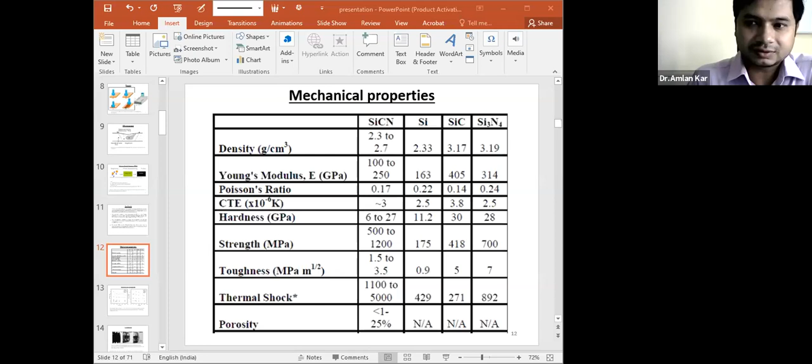Thank you sir, just let me check whether my presentation is visible. You may please. Okay sir, we will wait for like 9:30, it's the scheduled time. We'll wait for a few minutes. Meanwhile you can just keep your cover page up, sir. Okay, now I'm just checking whether it is visible or not. Yeah, it's visible sir, okay.

So are you, oh sorry. Yeah it's visible sir, good. Now you can see? No, yeah sir. Yes sir, okay.

So we'll wait for a few more minutes sir, let the participants join. Yeah, no problem. 9:30 is the scheduled time, right sir? I'll let you know at what time we would start, maybe hardly 5 minutes, it will take 5 to 10 minutes sir. Okay no problem, how are you doing sir?

Now everything is standstill, there is no movement. Yeah, same thing here also. But people thought of starting this education institution with students and all, but there were some problems occurred in different states.

We had a plan of inviting students on campus. It wasn't successful because at the beginning students showed willingness, but later they said one of my friends would come, then I would join, but no one came. Still we took measures and made respective arrangements for students' arrival on campus, but it didn't succeed. So they are sticking with the decision that they would attend most probably after this December, that's what they were telling.

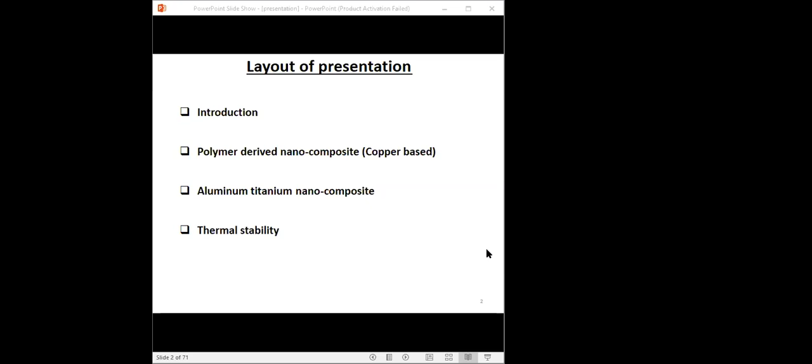Let me give you brief details about Professor Amlan. Professor Amlan completed his PhD in mechanical engineering from Indian Institute of Science, Bangalore, in 2017. His PhD work was on micromechanisms associated with friction stir welding of aluminum with titanium. Dr. Amlan completed his MTech in 2011 in metal forming, metallurgical and materials engineering from Indian Institute of Technology, Madras. His thesis title was Lateral Bulging Measurement and Compensation of Laser Cut Press Brake Bend Aluminum, Mild Steel, and Stainless Steel Sheet Materials.

He completed his BTech in 2009 from the Department of Mechanical Engineering, Jalpaiguri Government Engineering College. His BTech thesis was titled Efficiency Determination of Industrial FBC Boiler and Overall Study of Steam Power Plant, in 2008. If I speak about the research experience and various activities Professor Amlan is dealing with, there are many more to mention.

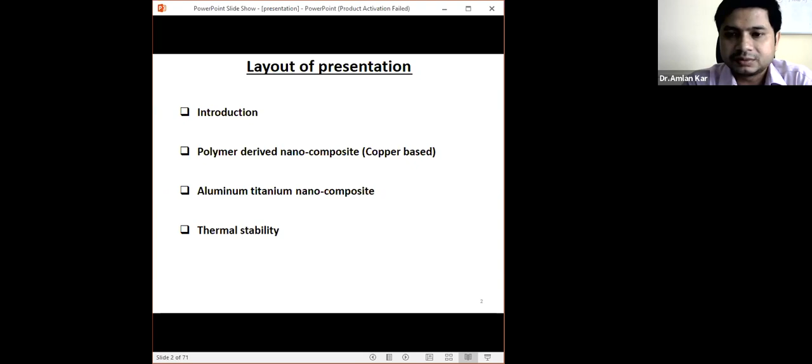So the layout of my presentation is: I will start with an introduction about nanocomposites, and then we'll discuss some case studies. The first one is the polymer derived nano-composite, which is a copper-based nano-composite. The second is the aluminum-titanium nanocomposite, developed from welding of aluminum and titanium, where in the weld nugget the composite is developed locally. We'll study the different influences of it, and finally study the thermal stability of this composite.

As far as introduction is concerned, we see nanocomposites in different parts of the world and in day-to-day life, but we don't realize it all the time. A nanocomposite is a multi-phase solid material where one of the phases has 1, 2, or 3 dimensions of less than 100 nanometers, or a substructure having nanoscale repeat distance between the different phases that make up the material. Basically, a nanocomposite is a composite where one of the constituents is in nanoscale, meaning generally less than 100 nanometers.

In different systems, we have seen nanocomposites in our day-to-day life. Nanocomposites are found in nature as well, for example in the structure of abalone shells, and also in our bones.

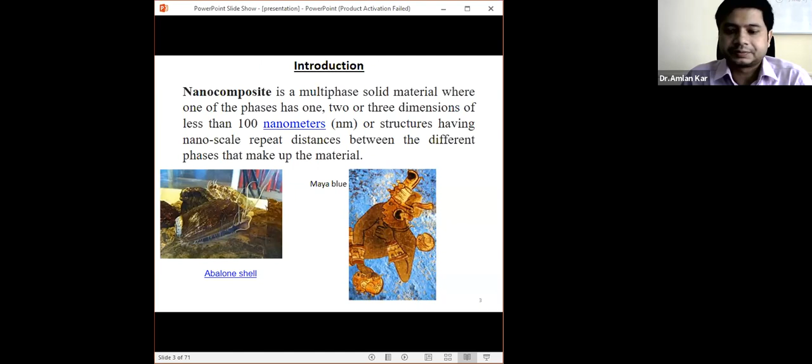So what are the important properties? In mechanical terms, nanocomposites differ from conventional composite materials due to the exceptionally high aspect ratio we obtain. Aspect ratio means surface to volume ratio. The reinforcing material can be made up of particles, sheets, fibers, polymers, and different kinds of materials.

Different kinds of material have been mixed together to form a nanocomposite. In this nanocomposite, the main important factor is the interface between the matrix and the reinforcing particles, or whatever phases are used for reinforcement.

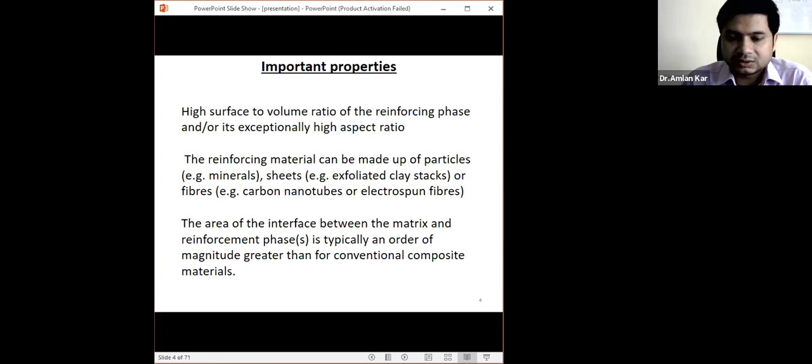This interface is very important, because during tensile testing, the interface is subjected to a higher amount of residual stress. To overcome or sustain this residual stress, the interface properties should be very high compared to the matrix material. Otherwise, interface fracture may take place.

There are different types of composites we have seen, but basically the objective is to improve the strength of the material. So the matrix can be reinforced with a second phase material to obtain the composite. We have also discussed that the second phase in a composite is generally in the nanoscale range in case of nanocomposites.

There are different types of nanocomposites that have been worked on: ceramic matrix composite, metal matrix composite, polymer matrix composite, magnetic nanocomposite, and heat resistant nanocomposite. These are a few, but the first three - ceramic matrix composite, metal matrix composite, and polymer matrix composite - are the three matrix composites which have been extensively used or worked on.

For example, metal matrix composite. Metal has been used as a structural component in metal matrix composite for several reasons, because of high modulus of elasticity, dimensional stability, high specific strength, formability, and machinability.

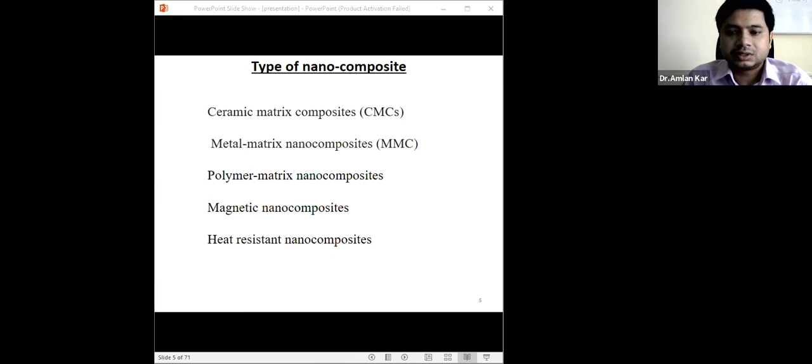There are different manufacturing or synthesis methods to obtain a metal matrix composite. There is the molten state method and the solid state method. The molten state methods are casting, liquid infiltration, spray deposition, and in situ processing. Spray deposition means you melt the metal, then the particulates as well as the molten metal are sprayed onto a substrate to get a composite material. It is a deposition method.

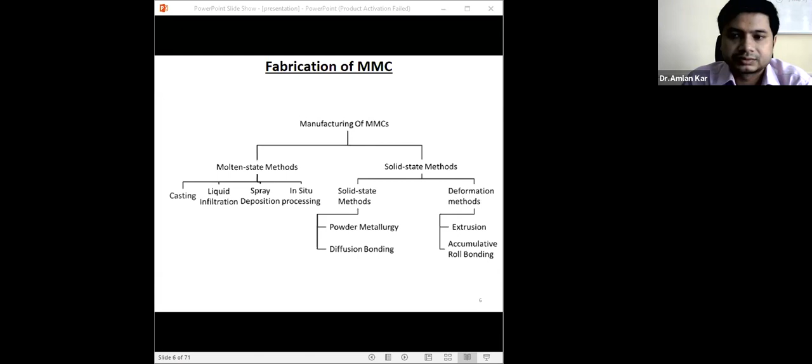Similarly, there are different solid state methods available, like powder metallurgy and diffusion bonding. These are two solid state process methods, and deformation methods are also used, like extrusion and accumulative roll bonding. A combination of both gives you friction stir welding or friction stir processing method. These are the different methods through which you can get a metal matrix composite.

First, we are discussing the polymer-derived nano-composite of the copper based matrix. We have also worked on aluminum with the same methodology. So what is the method? This is the friction stir welding method, a solid state welding method through which the nano-composite has been fabricated.

What are the different steps, and why is the friction stir welding method very useful? Solid state methods have gained a lot of interest recently because issues related to melting of the material and solidification, like solidification defects or porosity, can be substantially reduced using the solid state method. One popular solid state method is powder metallurgy. The powder of both the matrix and the reinforcement are mixed together and compacted, followed by sintering at high temperature. In this process, porosity in the matrix is the common issue and the main problem.

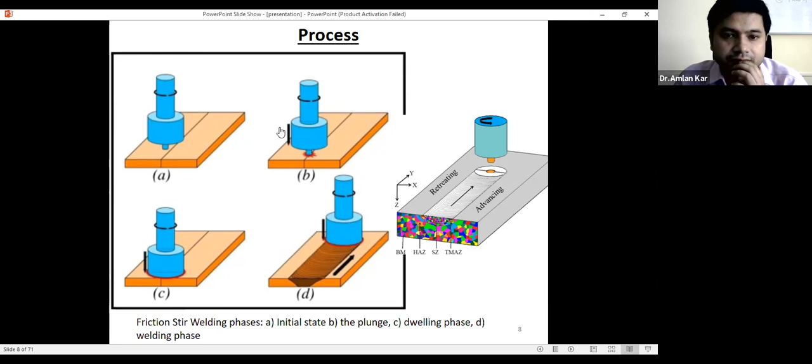So if I show you one of the processes, then you can understand. I think you cannot see. Okay sorry, let me show you the process. Video is not coming. One minute. I think there is some issue, that's why the PPT is not able to show.

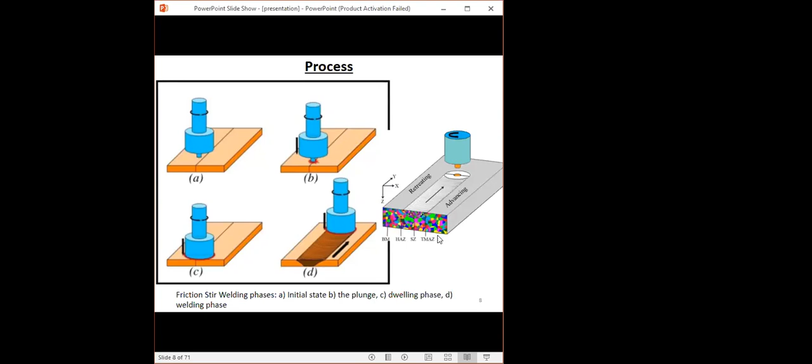So basically this is the process, and after processing you can see different kinds of phases being formed, and there is grain refinement because of high deformation energy being applied, high strain and strain rate deformation. Because of that, in the matrix material you are getting the reinforcement particle as well as grain refinement.

So if a material is subjected to grain refinement, then due to the Hall-Petch equation, which defines that if the grain size of the material decreases, there is an improvement in mechanical strength. So since in the nugget or the processing zone the microstructure is very, very fine, you can expect a better mechanical property.

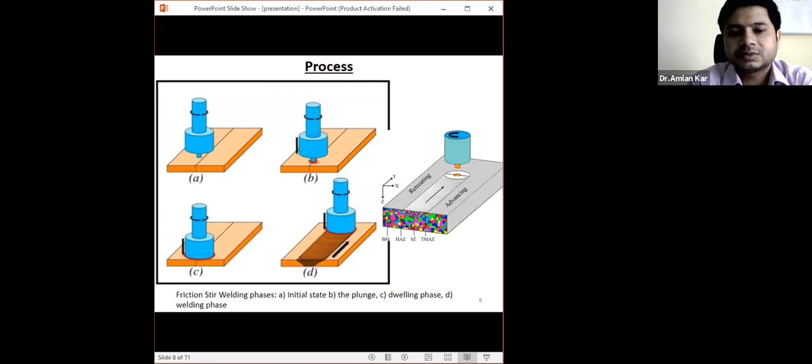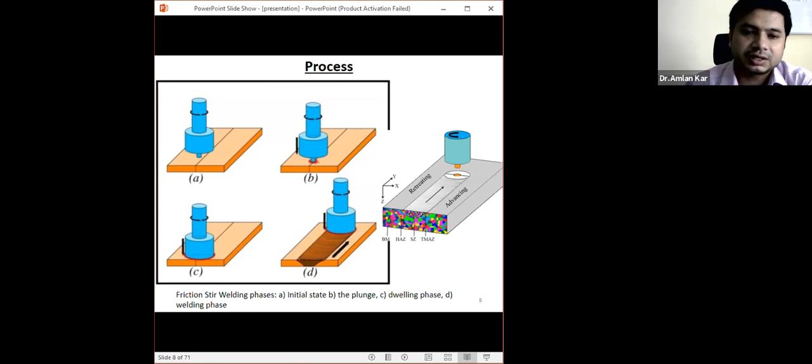As well as you are adding some reinforcing particles like ceramic particles or metal particles. Because of these particles also there is an improvement in mechanical property, which we can see by conventional methods also, like powder metallurgy. So if you add some particles homogeneously, there is an improvement in mechanical property. So there is a two-way advantage you are getting in this particular case, and ultimately you are getting the composite property in the nugget zone.

If you consider this welding, the center of the zone is subjected to some sort of welding. So this is a particularly useful method for repairing work, and also if you want to improve the mechanical property of certain locations of your component, then this is a very ideal method to improve the property of particular locations.

Because if you go to some other welding means, or during repairing work, then due to the heat affected zone and the melting of the material, associated defects arise, like solidification defects, porosity, residual stress. All these sorts of problems come into picture. But since the temperature evolution in this particular case is much lower than the melting point of the material, the problem due to solidification does not come into picture.

And since the temperature is very low, you can overcome the residual stress substantially. So therefore, this is the process where you can develop a local composite in a particular location where you need improvement in mechanical property.

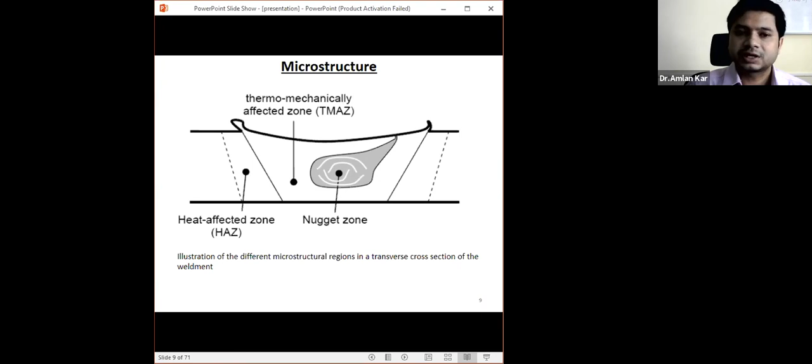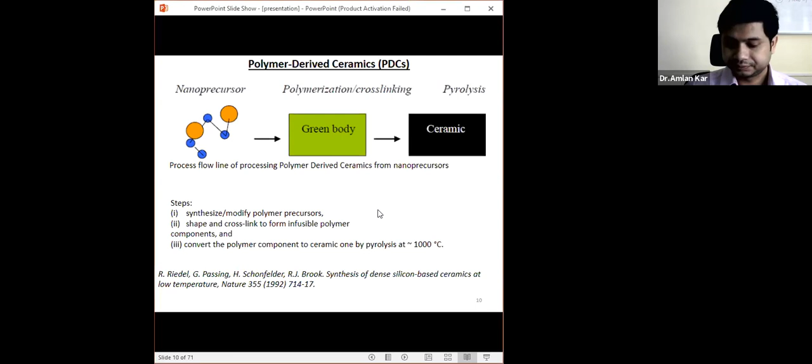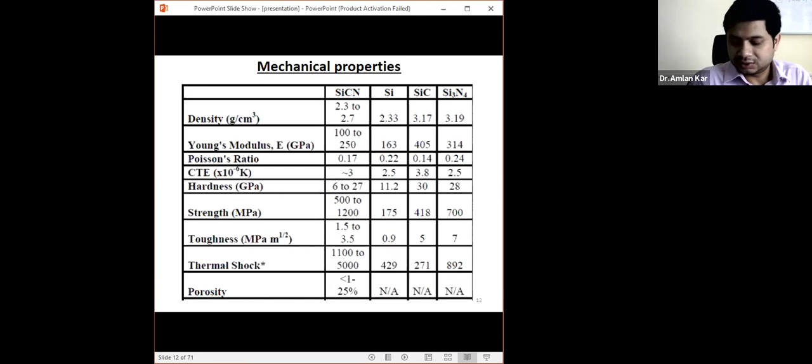These are the factors considered during fabrication of the composite. Mechanical properties like hardness and modulus of elasticity are much comparable to the other particles. The modulus of elasticity is very low compared to other ceramic particles, but slightly higher compared to silicon particles, so depending on the property, you get a different kind of composite material.

In the present case we are looking at Si3N4, SiCN. The major challenge is that because of the higher hardness of these ceramic particles, as I discussed, the hardness is very high, measured in gigapascals.

Since the hardness is very high, the material is subjected to wear on the surface of the tool. Our tool is rotating continuously, so when the tool material comes in contact with the ceramic particles, the ceramic particle creates a crater on the surface, and therefore the tool surface is subjected to wear and tear.

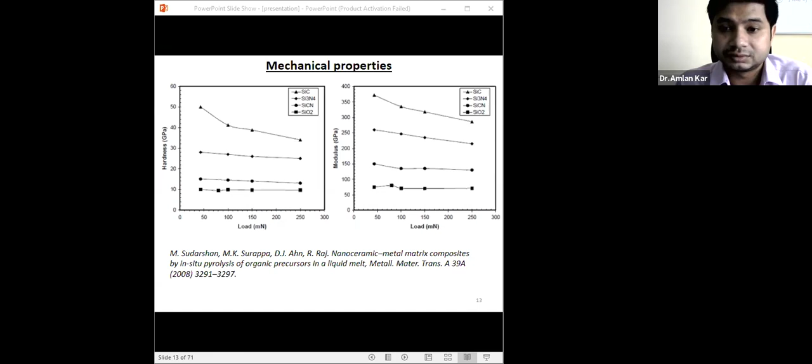This is the main challenge in case of ceramic matrix composites. So if you directly incorporate the ceramic particle in the matrix and then do the processing, it is very difficult to obtain a homogeneous property from the beginning to the end of the process, because depending on the length of the process, the features of the tool change.

Because of the change in the tool features, there is a change in the mixing of the particles in the matrix, and therefore there is a possibility of having a difference in the physical property of the material. So the objective is how you can overcome this problem.

This problem can be overcome as we can see in this process. Here the polymer particle we are getting is directly incorporated into the matrix material. You can see this is the matrix material, copper, and the polymer. You are cutting a groove, and the polymer particle is filled into the groove.

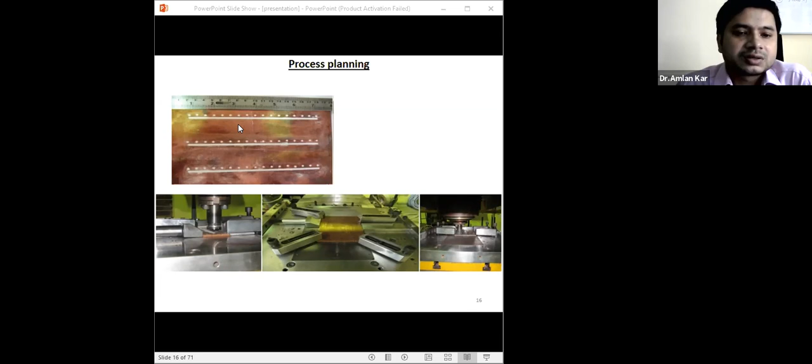Since it is a nano-grain size of the polymer particle, when subjected to pyrolysis, that nano-sized polymer is converted to nano-sized ceramic particles. Then when you process it, there is no possibility of wear of the tool, and hence we get a complete nano-composite.

After pyrolysis, the sample is processed again using the same process parameters to redistribute the ceramic powder and remove porosity if present. Generally porosity is available in the particle because when it is subjected to pyrolysis, whatever gas evolves from the polymer creates or develops porosity inside the matrix. To overcome this porosity effect, a third pass or additional friction stir processing has been conducted to eliminate the porosity.

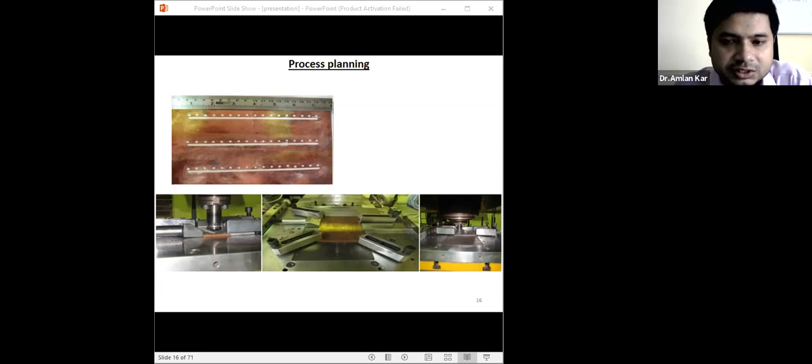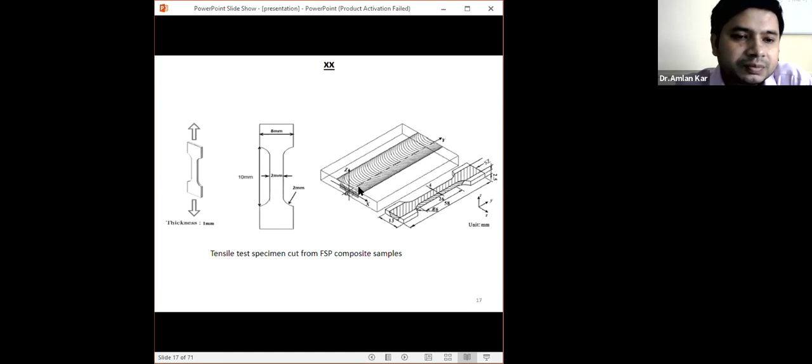This is the sample dimension. You can see from the interface, from the center we have taken the sample. This dimension is specifically chosen to measure the mechanical property of the center portions. This is the composite being developed by my colleague, and you can see this is the center portion, from where you can take out the sample and get the microstructure.

After the deformation, you can see there is a substantial amount of grain refinement. But if you add additional friction stir processing passes, there is an increase in the grain size due to the higher heat input. So it is important to have process optimization.

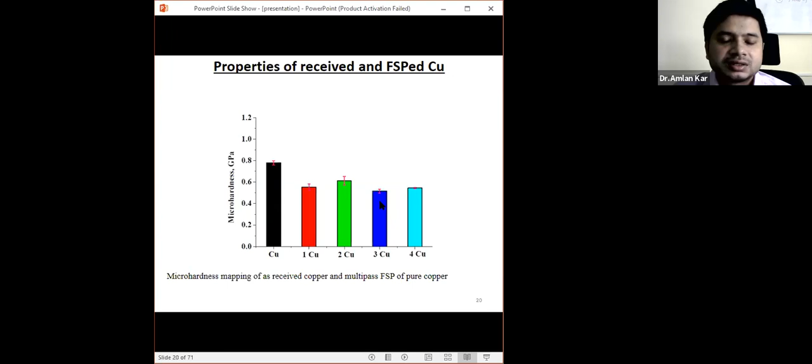You can see the microhardness. Since after the fourth pass there is an increase in the grain size, you can see there is a reduction in the microhardness.

If you see the number of particles after the first pass, intermediate pass, and the fourth pass, you can see that after the fourth pass there is an increase in the number of very fine particles. This is because of continuous fragmentation of the polymer particle, which has low fracture toughness as I discussed. Because of the low fracture toughness, it gets fragmented, and because of the fragmentation, the coarse particle that was there is subjected to becoming nano-sized. This nano-sized polymer particle is consolidated and distributed in the metal matrix.

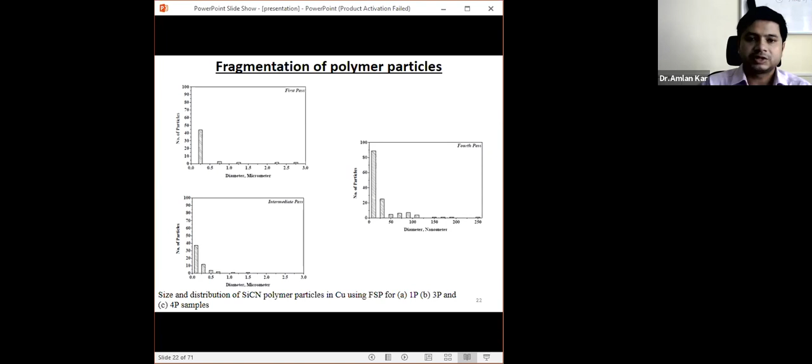You can see that when this polymer particle is there, there is an improvement in the microhardness a little bit, not substantially.

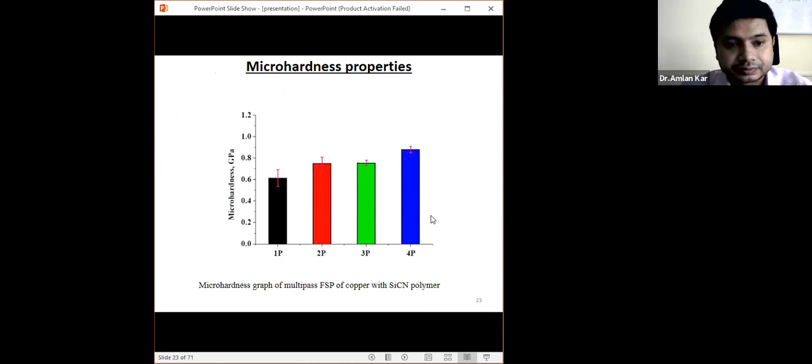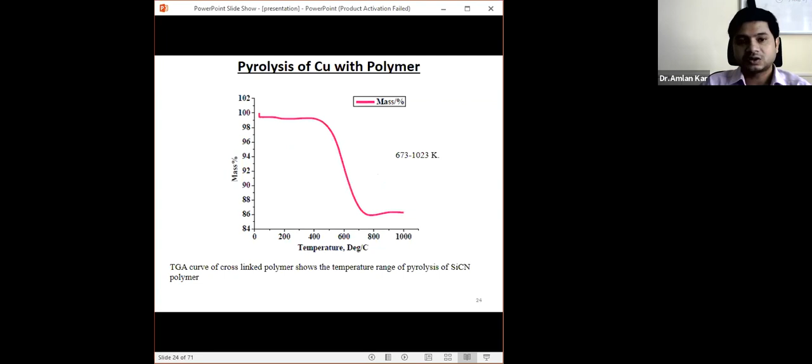To understand the pyrolysis temperature, our colleague has done some TGA analysis. From there we understood that the pyrolysis temperature, or the degradation, starts at 673 Kelvin and ends around 1023 Kelvin. Within this temperature range there is degradation, meaning this is the temperature at which there is mass loss of the composite, and this mass loss is due to pyrolysis of the composite material or pyrolysis of the polymer material. We have also calculated the temperature of the process, and we have seen the temperature is around 923 Kelvin, which is within the range of pyrolysis temperature.

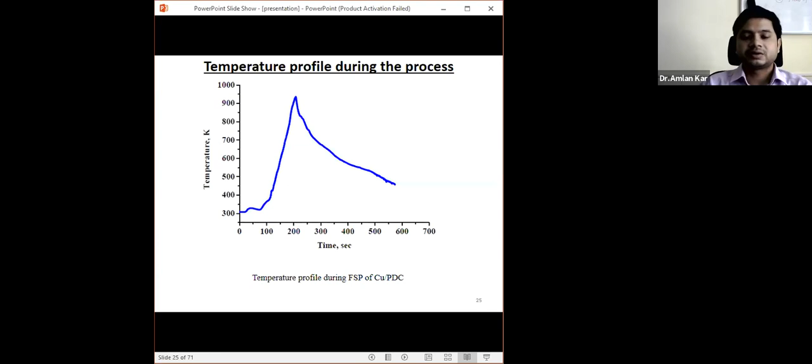So we can understand that during the process itself, some of the particles might be converted to ceramic, and these particles are nothing but very nano grain size particles developed during the process. Why only the nano grain size particles are subjected to pyrolysis so easily? That is because the nano grain size particles have a higher aspect ratio, so the activity range is also substantially improved because of the higher activation of these nano grain size particles. This is subjected to pyrolysis very easily, the activation energy for pyrolysis is substantially reduced, and therefore it undergoes pyrolysis and converts to ceramic very easily.

And we have seen from the phase analysis that there is a formation of different sort of compounds - SiCN, because SiCN has also been seen, and Cu-SiCN also been obtained. So you can see different pores formed in the intermediate stage, and we can see also the pores formed inside the particle as well.

And during the deformation process, since the friction stir processing is a high strain deformation process, whatever crack been developed inside the particle is actually propagated further. And because of the propagation of the crack, this individual layer is subjected to fragmentation. Because of the fragmentation, you can see smaller grain size, smaller particles are also found in the composite material.

So basically, because of this fine distribution of the particle and because of the pores, this cracking of the particle takes place during the deformation, and therefore we obtain a fine particle distribution in the final composite matrix.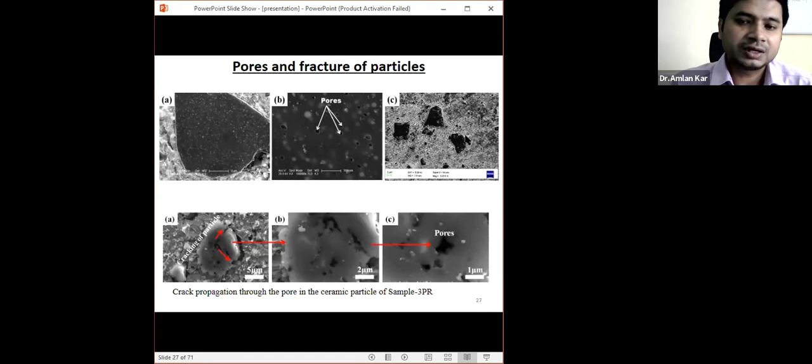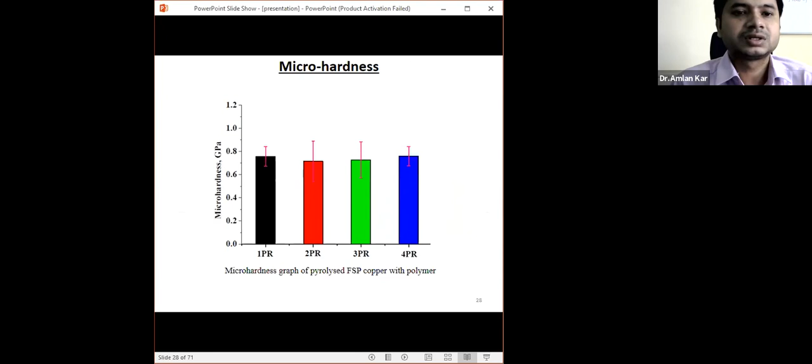And after the pyrolysis, you can see there is no change in the hardness. Why is there no change in hardness? Because of the availability of a high fraction of pores in the composite. During the indentation, it does not resist the indentation load because of the pores available in the composite, and therefore there is no increase in the hardness.

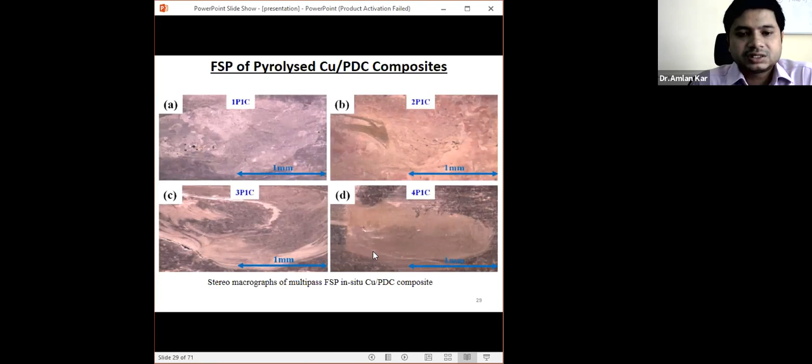And this is the microstructure. Macrostructure, you can see - after the first pass, this is inhomogeneously distributed, but after the fourth pass, you can see their distribution is more or less homogeneous.

And you can see also there is a distribution - this is the first pass and this is the final pass. In the final pass, you can see the reinforcing particle is substantially reduced, and the size is very, very small. The distribution is the Gaussian sort of distribution, you can see.

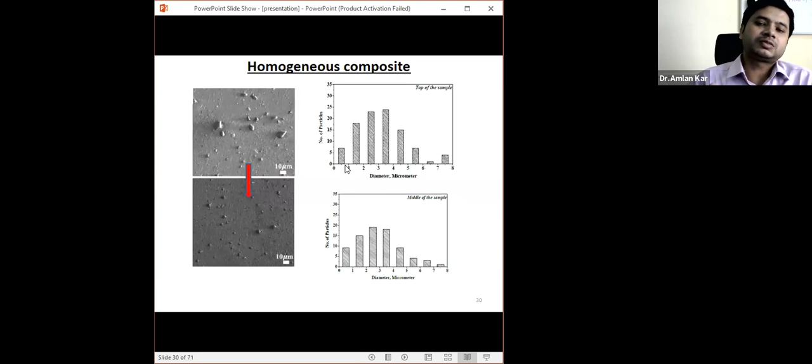And this sort of distribution is very useful in metal matrix composite, because it gives the useful property or balanced property in the metal matrix composite. And this Gaussian sort of distribution you can find in the top of the sample, middle of the sample, and the bottom of the sample. Because of the homogeneous distribution, we get homogeneous property from the top to the bottom of the composite.

And this is the microstructure. You can see this is the EBSD image. From there, you can easily find out the microstructure ranges from something about 0.1 micron to 10 micron - even the microstructure of the matrix material I'm talking about, it is very, very fine. The average grain size is around 1 or 1.2 microns.

So the microstructure of the base material initially we had taken was how much? It was approximately 74 microns. But after the process, the microstructure of the matrix material itself is very, very fine. So according to Hall-Petch relation, we can expect a better mechanical property if we don't consider the reinforcing influence. Depending on the reinforcing particle, the property could have been improved further.

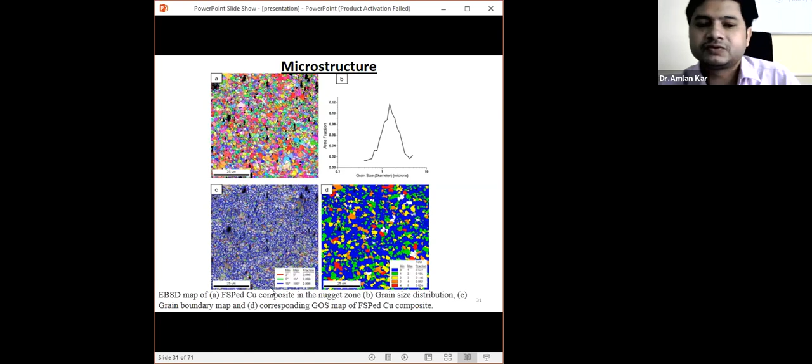And this is, you can see there is a different type of grain boundary you can see. Here the different grain boundaries you can see. There are three kinds of grain boundary that can be visible: subgrain boundary, low angle grain boundary, and high angle grain boundary. So depending on the color, you can find out what kind of grain boundary has been developed during the process. From there, you can easily find out that 80% of the grains are surrounded by high angle grain boundary, which is represented with the help of blue color here.

So since the material is surrounded by high angle grain boundary, that means it is a recrystallized microstructure. And from the GOS map on the right side, you can see it represents how much dislocation has accumulated inside the grain. From there you can see the range is 0.0 to 2, the minimum is 0 and the maximum is 2. The color representing blue and green actually represents the recrystallized grain. So you can see that almost 80% of grains in the matrix material are recrystallized. So since the matrix material is completely recrystallized, we can expect better ductility.

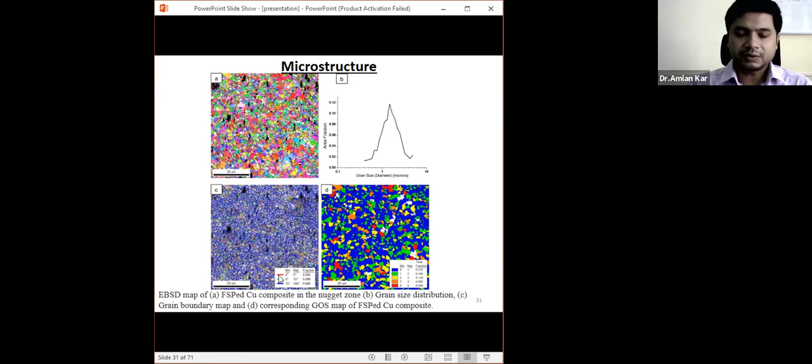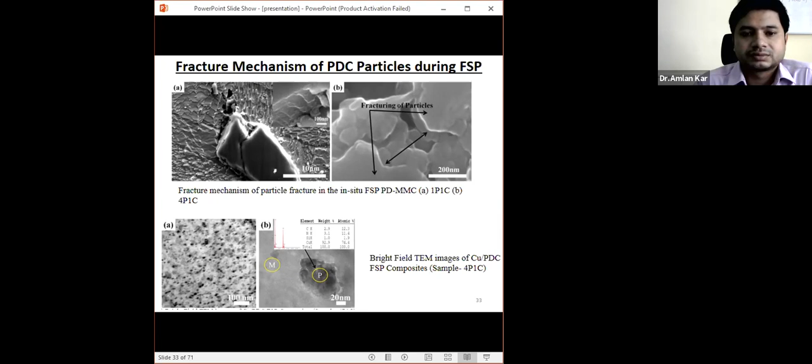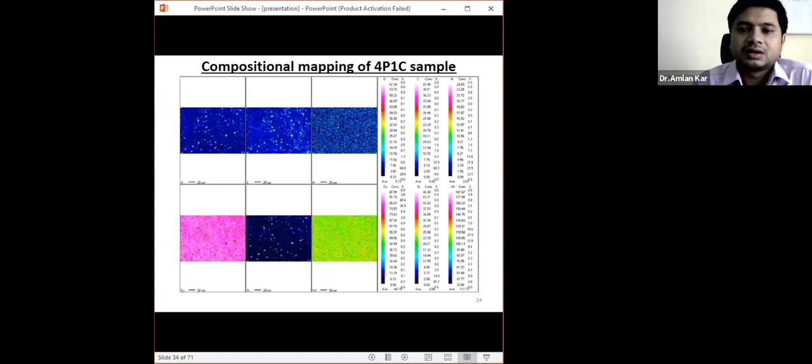Which is SiCN, can be clearly visible. So this is a fabrication of homogeneous metal matrix composites, which has been derived from the polymer particles. And because after the final pass, if you find some pores and so on, you do a second pass or additional pass, then the pores and any defect present at the interface of the copper and the particle, as well as in the matrix or in the particle, get eliminated.

So therefore after the final pass you can get a very good microhardness property of the material, which is close to 2.6 gigapascal. This is very, very high. If you compare with respect to the initial base metal, initial processed copper, it is almost 3 to 4 times increase in the hardness property.

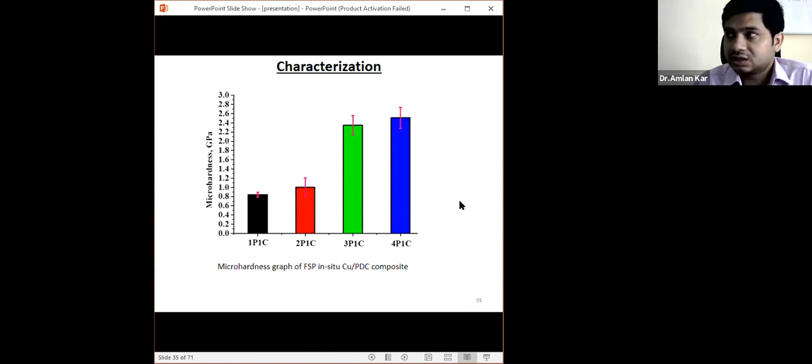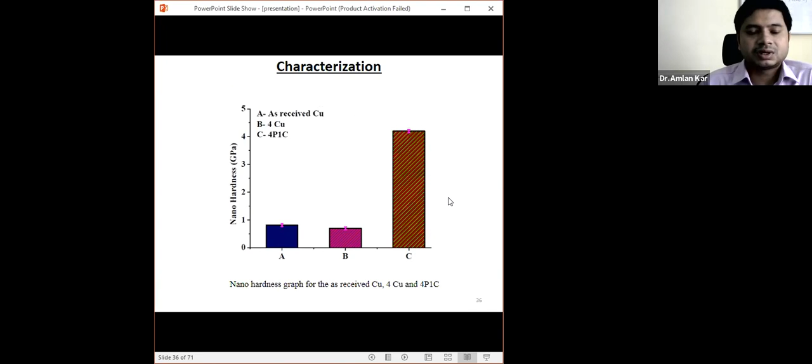So compared to the copper also there is an improvement in the nano hardness property of the particles. What are the reasons for that? Because we are getting the advantage of matrix refinement as well as particle refinement. The particle, which is in the nanometer range, because it is nanometer range, we already discussed the surface to volume ratio is very high.

Or the aspect ratio of these particles is also very high. So therefore we can get activity at the interface level also, and therefore the bond between the particle and the matrix is very strong, and therefore we get very good mechanical properties, like mechanical property in terms of yield strength, elongation, and UTS. Elongation is very high because the matrix material itself is completely recrystallized.

And because of Orowan strengthening as well, where the comparatively bigger size particles or micro range particle size actually restrict the grain boundary mobility or the dislocation mobility. Because of that, there is an increase in generation of dislocations. In addition, the dislocations could not move further or pass through as well. Because of these two factors, there is an increase in the mechanical property in terms of tensile strength and elongation. And since we know that if any material has higher elongation as well as tensile property, the area under the testing diagram will also improve or enhance. So from there we can conclude that the toughness of this composite will be very high.

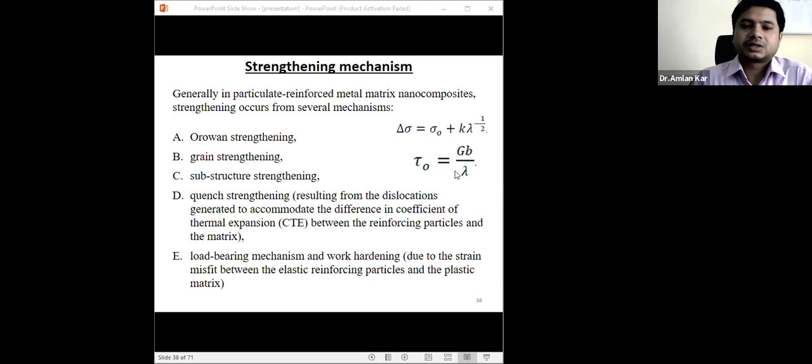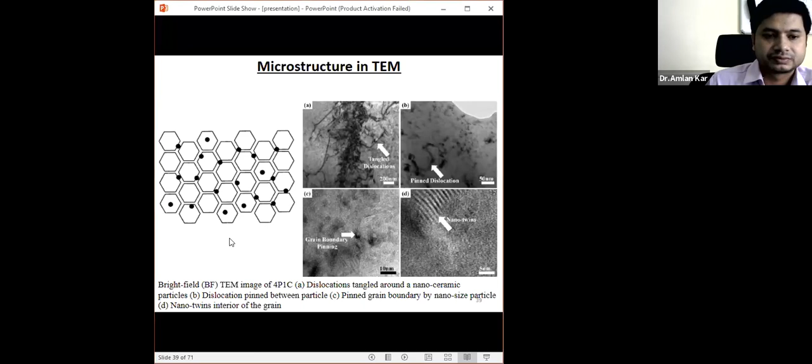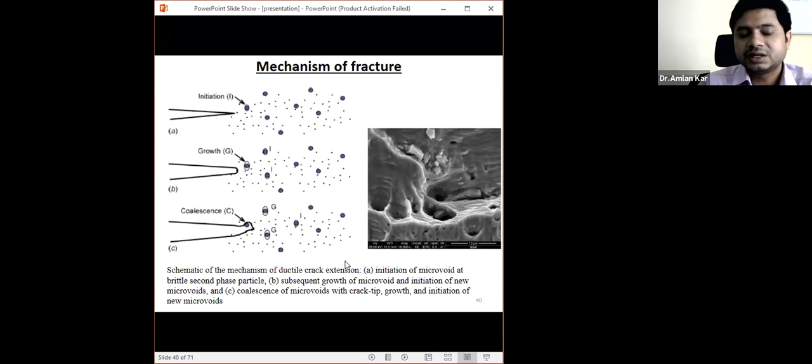So now we are moving to the second part, discussing the fabrication of nano-composite using friction stir welding. This is also local, and it is also the fabrication of thin strips of nano-composite. This is basically the process.

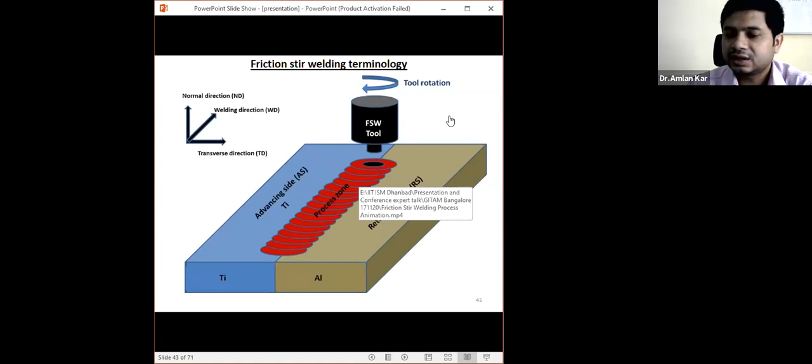When you take two materials like titanium and aluminum, the titanium and aluminum mix together in the process zone, forming a complete composite along the length. This behaves like a composite, and we can understand from there how the behavior takes place.

I have already discussed how the deformation takes place. Around the particles there is a plastic zone and a stirring motion. Because of this stirring motion and the friction between the tool and the matrix material, there is formation of a mechanical mixing zone in the weld nugget or process zone, and we generally observe wear of the tool and shear deformation of the material.

Those are the two phenomena taking place. So to restrict the wear of the tool, we have shifted the tool toward the low melting point material. In this case, we have shifted the tool to the aluminum side so that it has limited interaction with the titanium, and therefore we can prevent the wear of the tool.

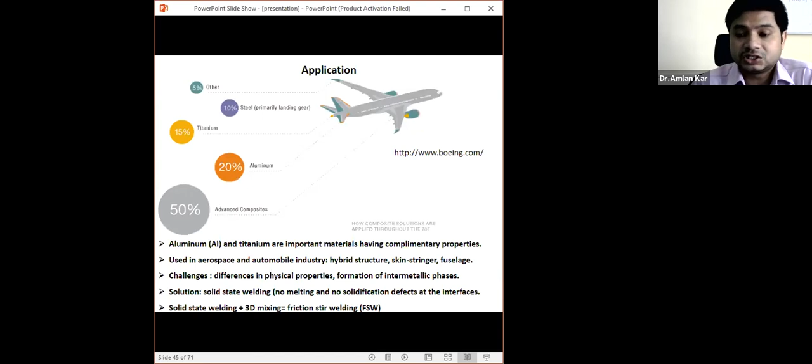These are extensively used in the aerospace industry because of the three-dimensional mixing nature of the matrix and the particles. If you take aluminum and titanium, you understand there is a substantial difference in their mechanical and physical properties, and because of that...

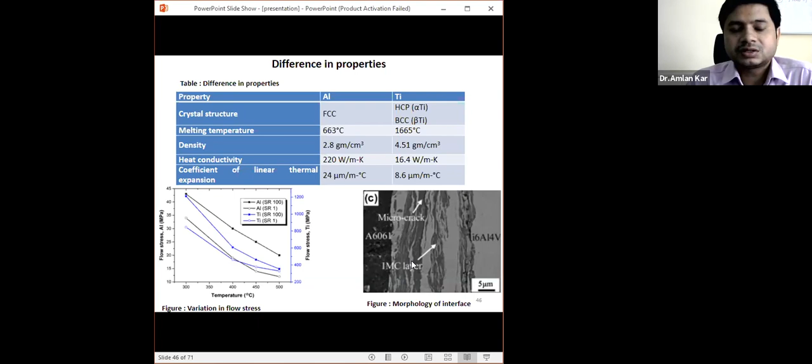Aluminum is recrystallized, but the titanium is subjected to some sort of fragmentation. During the fragmentation, you can see there is development of microcracks and an intermetallic layer at the interface. This is brittle particles which have been fragmented and distributed in the aluminum matrix, and because of that we get a composite property of the weld.

So we have estimated the temperature, which is approximately 410 degrees centigrade. Because of this temperature, we can understand that aluminum behaves like a plastic material, but this temperature is very, very low for titanium. That means this temperature is close to the melting point of aluminum, unlike titanium.

So the aluminum, during deformation, is subjected to hot deformation, but the titanium is subjected to cold deformation because of the difference in physical property. Due to that, the aluminum is generally recrystallized, unlike titanium, which is subjected to fragmentation.

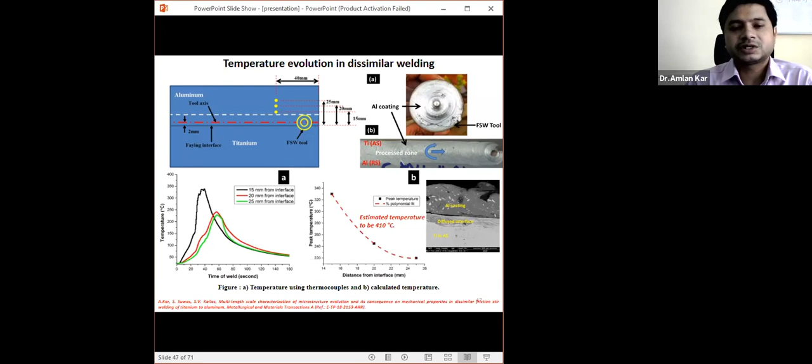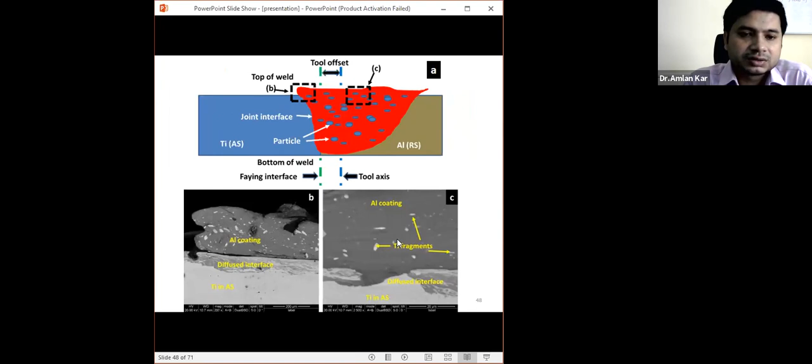So that is the schematic view. You can see that in the nugget zone, there are particles which have been deposited and fragmented, and therefore we get a strip of nano-composite. So you can see the particles, how they are distributed in the nugget zone.

Again, you cannot see, I think. And we have also...

Modeled the process, and we have seen the temperature evolution in this process is close to 410 or 450 degrees centigrade. One of the important factors we have seen is that the temperature below the tool shoulder does not vary much.

So during the process, from one side to the other, from the retreating side to the advancing side, or the advancing side to the retreating side, or in the three-dimensional nature, we can understand that the temperature variation is not substantial in this process. So whatever mechanism is taking place on the top of the weld should also be prevalent at the bottom of the weld as well.

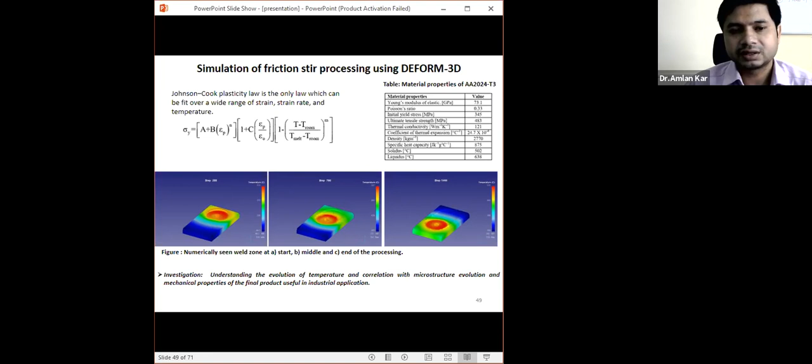We can find out that irrespective of the locations, the morphology or the distribution is similar. And from this distribution, you can see that as the particle size decreases, there is an increase in the number of particles. From there also you can conclude that if the particles are very, very small during the process, we have also obtained nano grain size particles, like 50 nanometer grain size, 50 nanometer particle size particles.

So if you take this trend, we can expect that the nanoparticles developed in this process are very, very fine, and the number of nanoparticles is substantially higher compared to the coarse particles. So as we have discussed, this sort of distribution is very common in different manufacturing processes, and in that sense, for the mechanical property, you can get a combination of mechanical properties.

If you have a micron size particle, a very fine particle, a nano size particle, you get load sharing property, a load sharing mechanism prevails. But if the nano size particle is distributed in a matrix, then you can expect to have higher strengthening, higher ductility because of the Orowan strengthening mechanism.

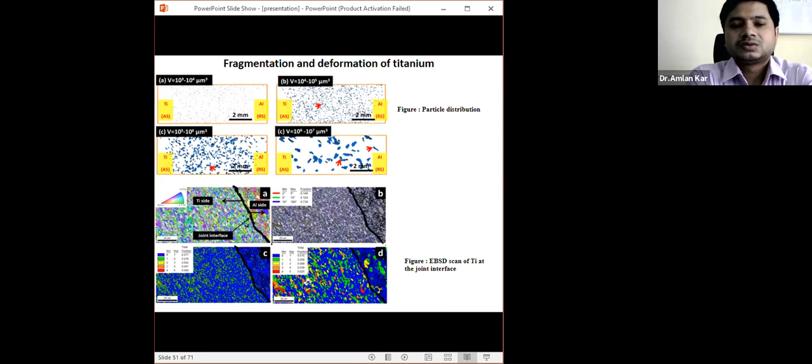We have seen that there is recrystallization, a very unusual phenomenon observed in titanium at 450 degrees centigrade. To understand the phenomenon by which we can predict or engineer the composite, we have understood the continuous evolution of the microstructure of the titanium. From the base material, you can see the microstructure is random, and the grain size is close to 50 microns.

As we come close to the titanium, close to the interface, we can see there is a substantial increase in the twinning. This is one or two twins we have seen in the microstructure, and from the GOS value you can see that most of the grains are completely recrystallized.

And this is the KAM map. The KAM map actually shows whether there is any dislocation activity in a particular location, and the GOS map actually shows the accumulative dislocation inside a grain. So that is the only difference between the GOS and the KAM map.

From here you can understand that the microstructure of the base metal is completely recrystallized, and as the material is subjected to a higher level of strain closer to the interface, twinning develops in titanium. Twinning is the additional mode of deformation in titanium.

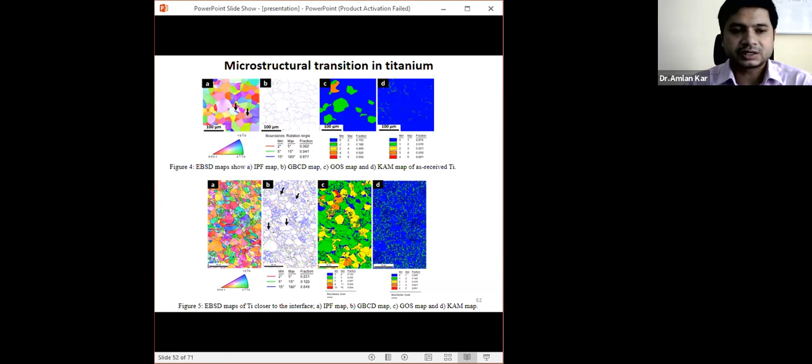At the interface, we can see a completely recrystallized microstructure, and because of that there is fragmentation in the particle. You can see this particle is fragmented from this particle, which is the original particle. From here, the A particles are being fragmented, and subjected to further fragmentation, leading to the formation of very, very fine particles.

So the mechanism we have developed is that adiabatic shear band is the only mechanism through which we can explain this phenomenon, the formation of adiabatic shear band. It is noted that in the adiabatic shear band the temperature is very, very high, close to 400 degrees centigrade, and this temperature evolution takes place only on titanium.

It's not a global temperature, it's a local temperature in the titanium. Because of the evolution of high temperature, it is subjected to recrystallize, called dynamic recrystallization. At the same time, since the adiabatic shear band is an inhomogeneous deformation process, it leads to the development of cracks in the titanium, and while deforming, the propagation of this crack leads to the formation of fine particles, giving us a different kind of particle.

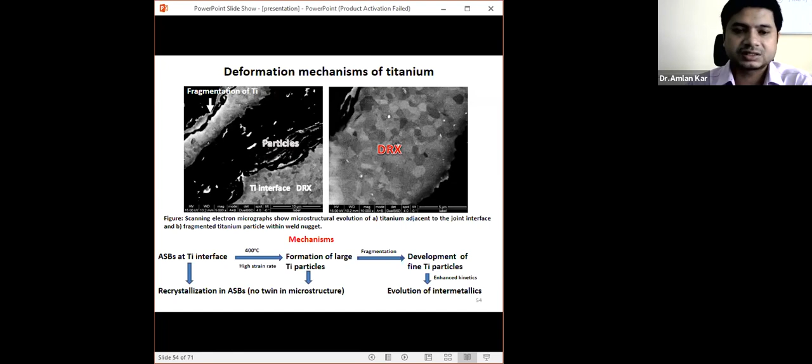So we can see here, this is one of the phenomena. This is the adiabatic shear band, and within the adiabatic shear band we can find very fine recrystallized titanium developed, and this is the recrystallized particle.

From here you can understand that within the particle there is no twin activity being observed, and from there you can understand that this is the adiabatic shear band driven process by which the particles have formed in situ during deformation, leading to the in situ formation of fine titanium particles or fine intermetallic particles in the aluminum matrix.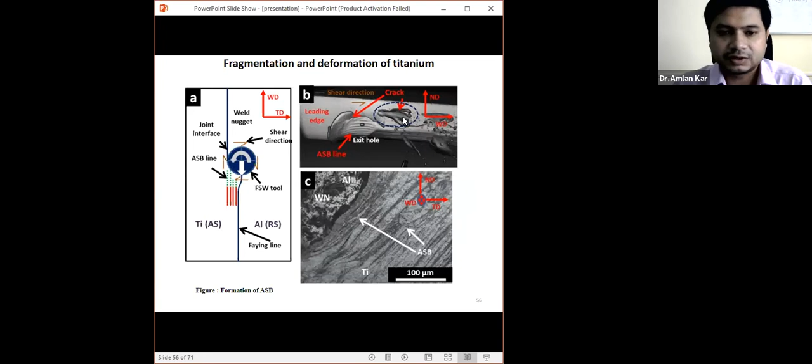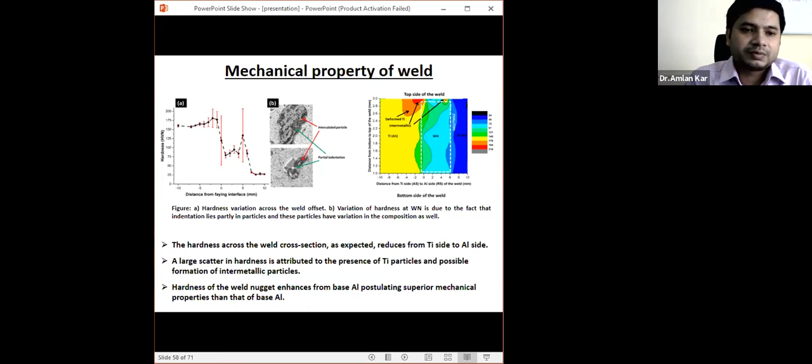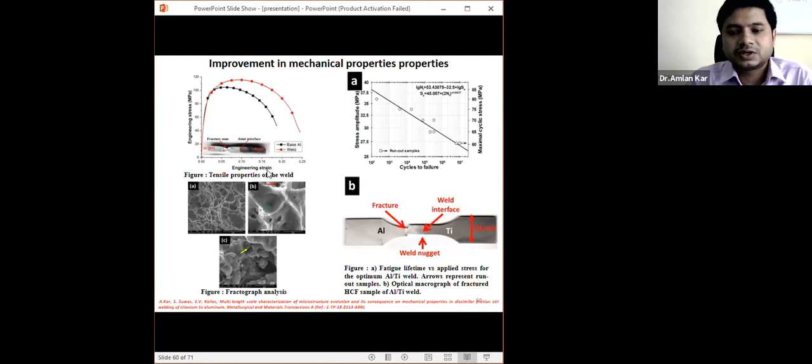You can see we have taken a very small sample from the weld nugget or process zone, and from there we get very good properties. We took it at the weld because this is the nugget zone, from where we get very good mechanical properties. You can see the particles are still embedded in the matrix even after fracture, which shows the interface property of the particles is good.

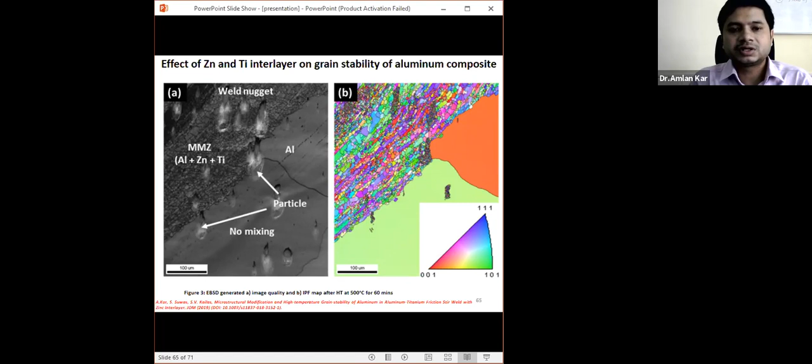From there, the grains are not subjected to grain growth, because the particles are sitting at the grain boundary and pinning the grain boundary mobility, which is very important for grain boundary mobility or grain growth. So the particle actually hinders the grain boundary mobility, and therefore we obtain very good grain stability.

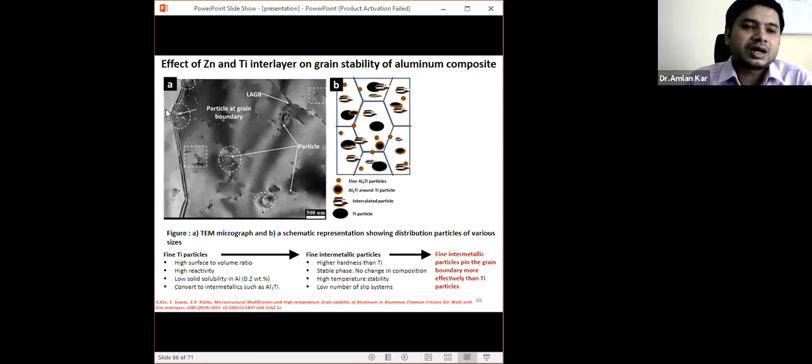This is schematically represented here. We can see some particles sitting at the grain boundary as well as particles sitting in the matrix material. The fine particle, mostly the intermetallic particle, has high temperature grain stability, does not degrade, and does not react at high temperature, so this particle sits at the grain boundary and pins the grain boundary mobility.

The same thing has also been observed when titanium particles are distributed in the matrix material. You can see here, this is outside the matrix, and this is the process zone, from which grain stability is substantially higher in the composite material.

So what are the mechanisms of grain stability in the metal matrix composite? When you get the fine particle, because of higher shear deformation at the interface, the property of the fine particle is a higher surface to volume ratio, and because of that there is higher reactivity between the particle and the matrix material.

Since the titanium particle has low solid solubility in aluminum, it does not react further and does not form a solid solution. Instead, it converts to an intermetallic such as Al3Ti. These intermetallics have higher hardness, higher grain stability, and phase stability at high temperatures. Since it has a low number of slip systems, it cannot be sheared off easily. Because of that, this fine particle sitting at the grain boundary makes the grain boundary stronger than the titanium particles, and hence we obtain very good thermal stability or grain stability of the metal matrix composite developed in the present case.

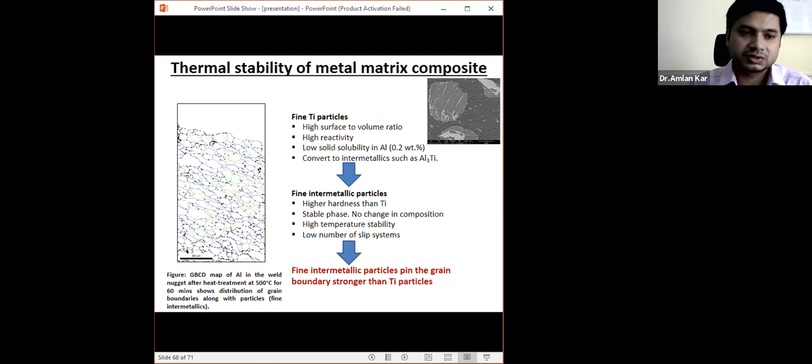We also developed thermally stable aluminum based PDC composite. Similar things we have developed in case of copper also, but in this case, the polymer we have taken is different from the polymer we used in case of copper.

The polymer, the method and mechanism is same. You take the polymer, cross-link it, and develop polymer particles. Then the polymer particle is subjected to fragmentation during deformation, basically dispersing the polymer particle by the FSP process, and then you pyrolyze it. During pyrolysis, the polymer particle actually converts to ceramic. By the way, during the deformation itself, the polymer particle is fragmented because of low fracture toughness of the polymer.

After pyrolysis, this nanopolymer is converted to nano ceramic, and it is embedded in the matrix material, which is aluminum. Since there are a lot of defects also, a lot of voids formed during the process, so an additional pass has been provided in the composite. So therefore, we get a highly dense composite material, aluminum based PDC composite, polymer derived ceramic composite.

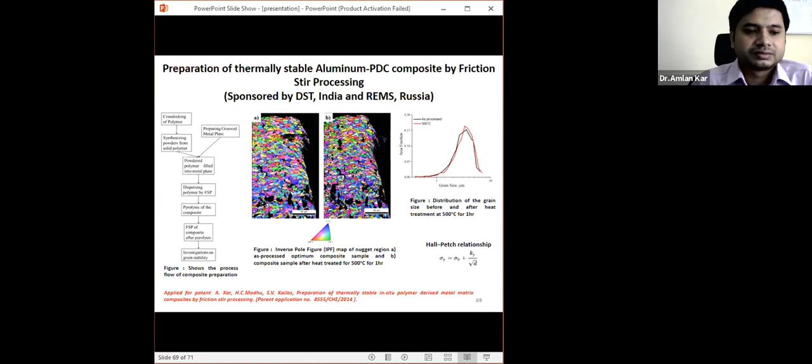We can see after the heat treatment at 500 degrees centigrade, there is no change in the grain structure. And this is the graph which shows the distribution of grain size before and after the heat treatment. From the Hall-Petch relationship we already discussed, we can expect better grain stability or better mechanical property of this composite.

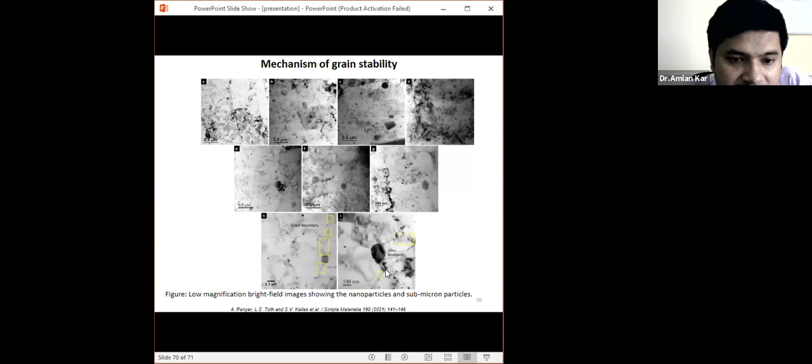As I was discussing, one of my colleagues has already studied this in detail and found that this particle is actually nanometer in size, and sitting at the grain boundaries. So therefore, it pins the grain boundary mobility and enhances the grain stability of the nanocomposite.

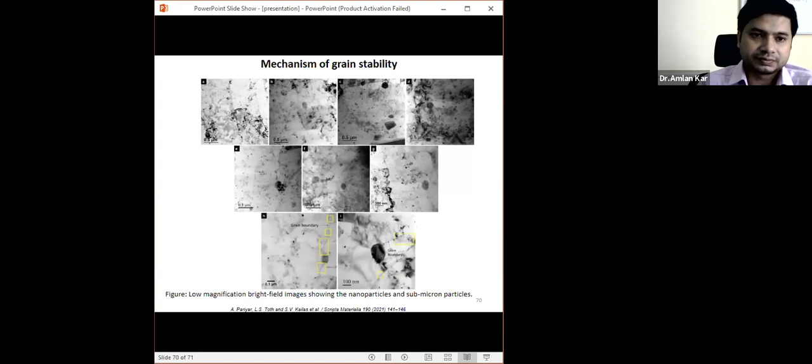So this is all about what I was trying to discuss about the nanocomposite. I hope you have understood the process. Thank you for your kind attention. If you have any particular questions, I'm ready to answer.